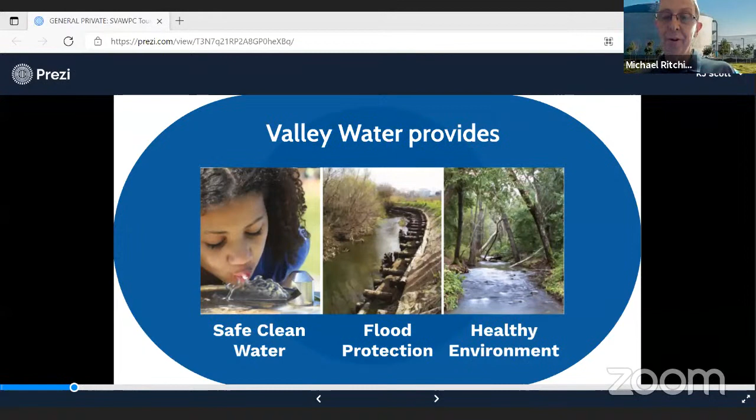Alright, so those are the 3 things that we do. Now I'll tell you a little bit about our domain—Santa Clara Valley Water District, Valley Water, covers Santa Clara County. The most important thing for you to know from this graphic is that we don't provide water directly to residents, for the most part. We provide our water to water retailers like San Jose Water Company, and they provide water directly. The total population in the county, with commuting and all those sorts of things, is about 2 million. But we do directly work with 4,700 well owners.

Now, this next graphic shows quite a comprehensive system that we manage in the county—all sorts of things happening here. First of which to tell you about is there are 10 reservoirs. When I first saw this graphic, I could not believe there are actually 10 reservoirs in Santa Clara County, but that is the case, and we do manage those 10 reservoirs.

All these lines that you see, for example the red lines, represent the pipelines coming from the Hetch Hetchy system, bringing water into the county from the Hetch Hetchy Reservoir. The orange lines represent pipes from the Delta conveyance system, and the green lines represent pipes delivering water to all the different water retailers in the county.

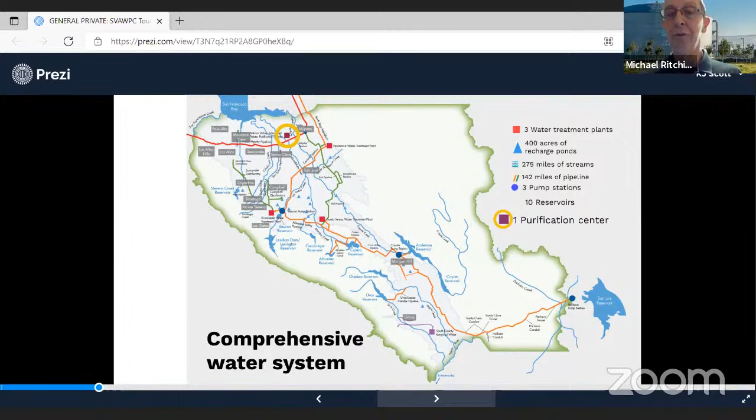We do have 3 water treatment plants: Rinconada, Penitencia, and Santa Teresa. All sorts of pumping stations, we're managing waterways. And most important for today is one additional thing we manage, the Silicon Valley Advanced Water Purification Center. That's up on 237 at Zanker, and we'll talk more about that soon.

So before we do that, we have a little poll check. We want to get your thoughts on something here: what percent of the water that we distribute in the county comes from local sources? What do you think? Is it 15%, 30%, 50%, or 70%? What percent of the water we manage do we obtain from our local sources?

You can see a lot of folks coming in and answering that question. We'll give a couple folks a little bit more time. We're already pretty close to getting everyone's response. And we will close the poll in 5, 4, 3, 2, and 1.

Okay, interesting to see almost an exact split between those answering 30% and 50%. The correct answer actually is 30%. We're here in a learning experience, as KJ has said, so no worries if you didn't know, but isn't that surprising? I thought it was surprising. Only 30% of our water portfolio comes from local sources, and that means both groundwater aquifers and those 10 reservoirs I mentioned.

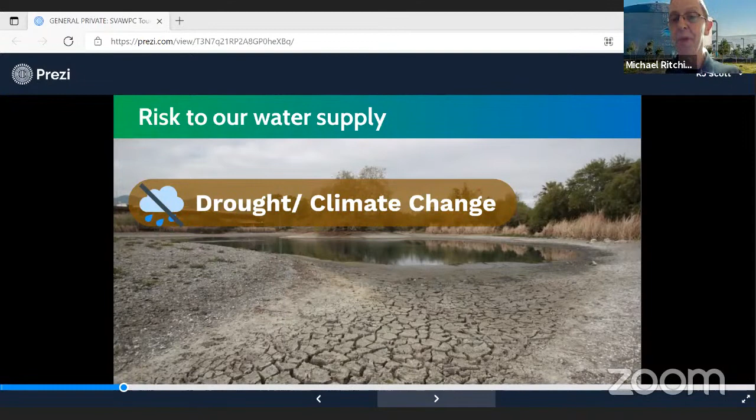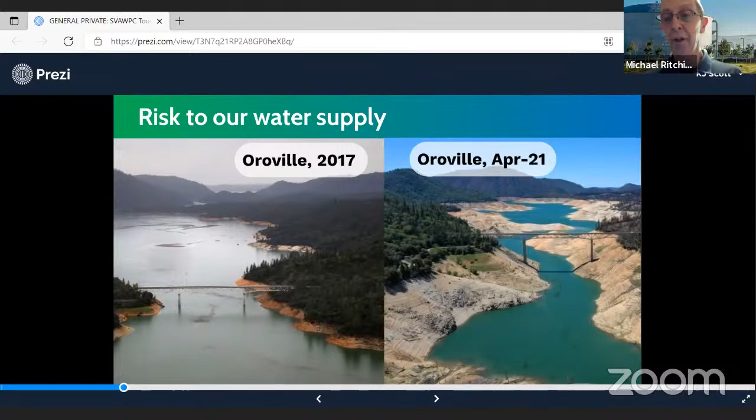So take a look at this next graphic to give you an idea of how severe things have been. Lake Oroville in our last really nice wet year, 2017, very healthy. This is one of the main state reservoirs up beyond Sacramento, and we certainly get a lot of water from there, as do a number of agencies in the state. But then as of April, very, very low - that's because of very little runoff, very little snow melt.

And then all the way into July, it's quite shocking, actually - if you take this next photo, you see basically we have no lake. I find it very shocking personally, but we're hoping - just this weekend, this lake rose 23 feet, was the article I saw in the paper. So it's got a long way to go, but at least it's going the right direction at the moment. So we have some work to do.

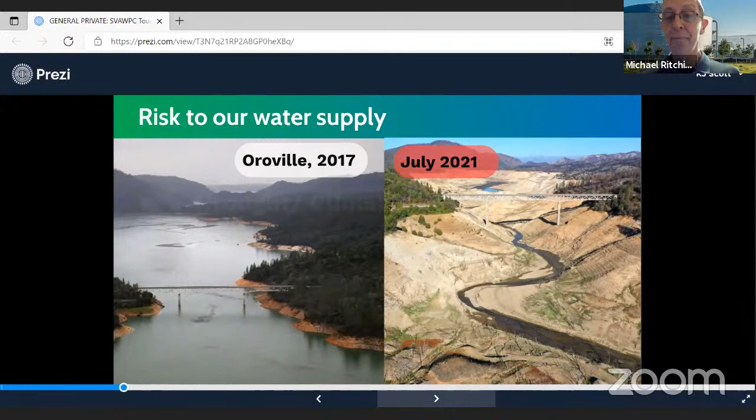Beyond climate change and drought, population growth is another concern. The census came in and said we're stable right now, but it's still expected to increase, so we have to account for more people needing water.

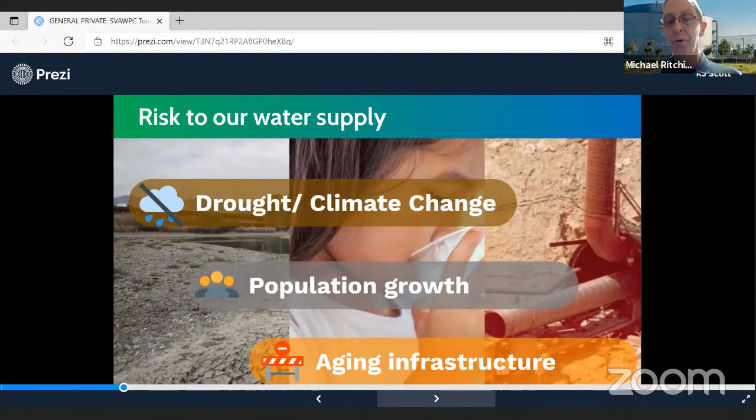Another thing we're worried about is aging infrastructure, one of which you've probably heard about is the Anderson Dam and Reservoir. This dam was deemed seismically unstable for a major earthquake beyond 7.0 on the Richter scale. They first thought we could repair and reinforce it, but after further study it was determined that isn't possible. So we've had to remove most of the water from this reservoir, distribute it as best we can to other places in the county, and now work has begun on rebuilding this. It'll be quite a big project to undertake.

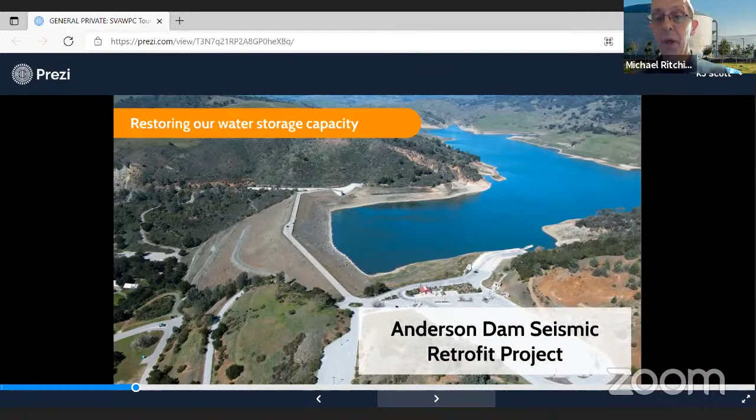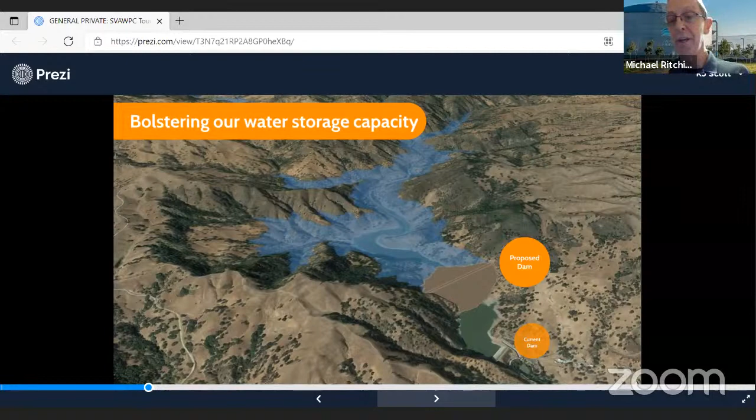Beyond that, we have another exciting idea. With climate change, we expect more extreme events - years of very significant drought, and years of maybe very large precipitation. So what we're thinking of doing is taking this tiny little reservoir in the county called Pacheco, the little one down in the corner, and building a new reservoir up above the current one. The tiny little one currently stores 5,500 acre feet.

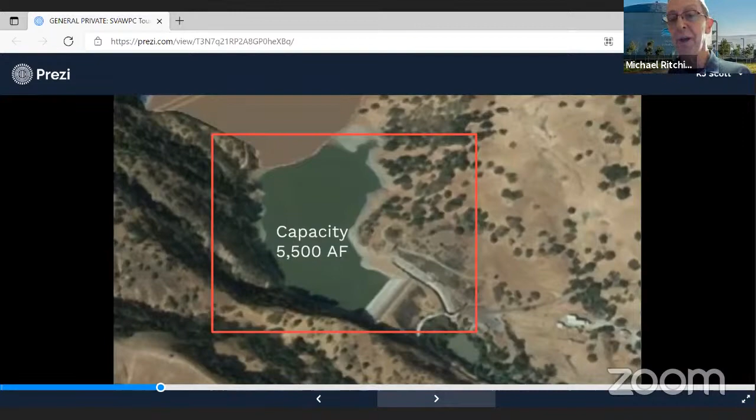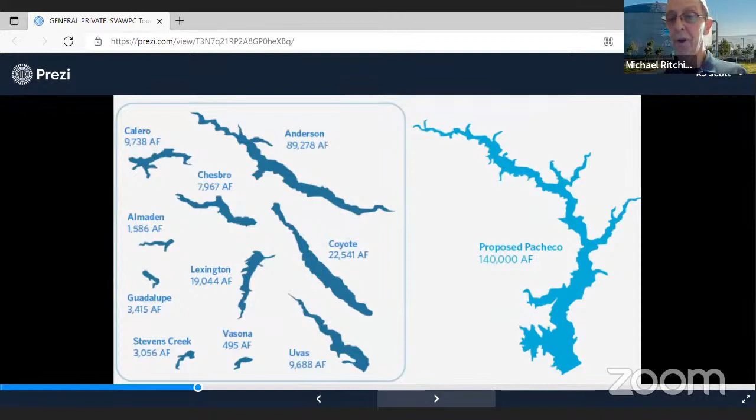This next photo shows some infrastructure issues as well, which need to be addressed. But the exciting part is, even in a normal year, we can't capture all the water - some goes into the bay. So this reservoir could help us capture water and use it, especially in those extreme wet years. It's a huge amount of water, 140,000 acre feet - enough for 1.4 million residents in a year. We would be able to double our surface water capacity. The 10 reservoirs we have now equal the proposed capacity of Pacheco alone, allowing us to store water for the future dry years we know we will have.

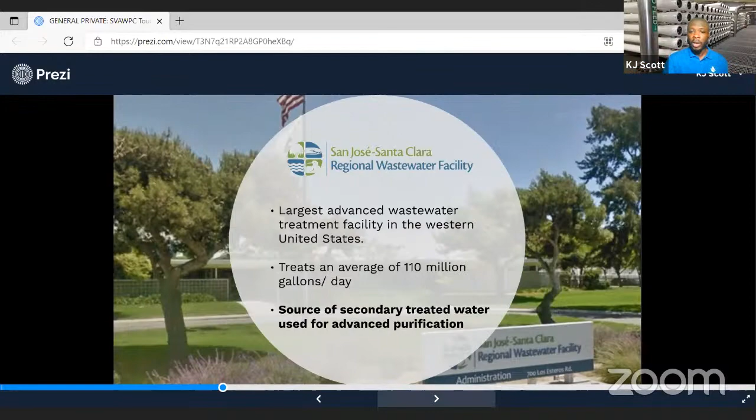When we talk about the Purification Center, we want to make sure everybody is familiar with the water cycle. The reason we bring up the water cycle is because it's why we're able to have water in the first place. All of the water here on Earth has been here forever - the Earth has its natural way of replenishing water worldwide, and that's through the water cycle.

So even all of the wastewater we create every day, the water cycle naturally replenishes and cleans it. But the water cycle can take a long time. As you all saw, we just got a lot of rainfall recently, but when's the last time we got rainfall like that? It's been a while, and it hasn't been raining as much today.

In order to make sure we have enough water for the 2 million residents in Santa Clara County, we must find ways to bolster our own local water supply. As Michael talked about previously, it's hard to rely on imported water when it's affected by drought and climate change. Right now 50% of our water capacity comes from imported means, so we can shrink that number down and boost our local water supply number up.

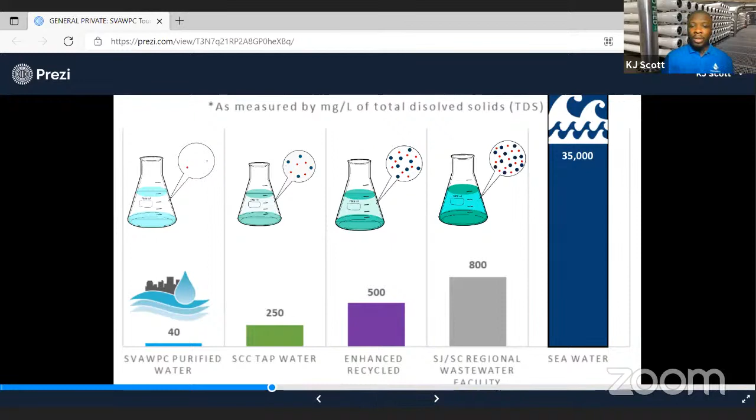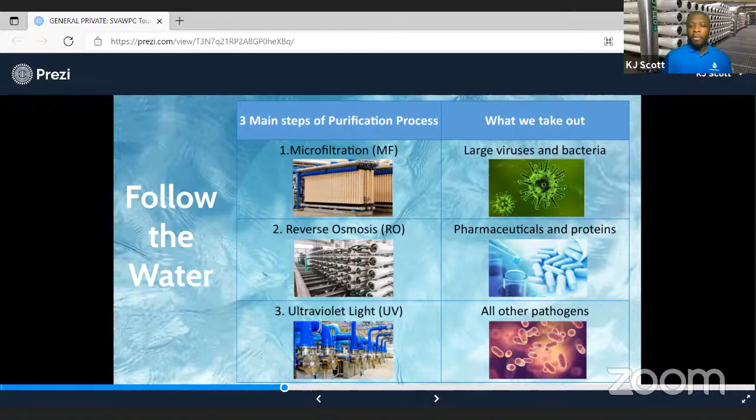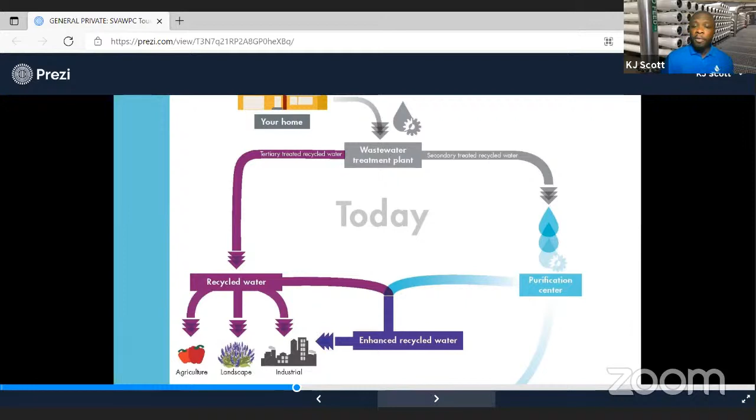This is how we are currently using the water. But in the future, we're going to talk about how we plan to use this purified water coming directly from the Purification Center to bolster our local water supply, or drinking water capacity more specifically.

Now we are about to tie up our virtual shoelaces, because if we were on campus right now, we would actually start walking. So we'll begin our virtual walking tour, and I'm now going to hand the mic back to Michael so he can get us started.

Great, thanks, KJ. So yeah, when you arrive at the parking lot at our facility, there's a little classroom right adjacent to it. You go in there first, get this first part of the presentation, and then you're ready to walk and come out outside.

A couple overview things to tell you that haven't been said already. Silicon Valley Advanced Water Purification Center is a collaboration and partnership between Valley Water and the cities of San Jose and Santa Clara. It's a testing facility, and its purpose is to study water reuse. We opened this facility in 2014.

As KJ said, typically in a day, 8 million gallons of advanced purified water is produced. It takes about 7.5 hours for the water to go through all the treatments we're about to talk about, and we'd love to have you come join us in person when we're able to reopen for in-person tours.

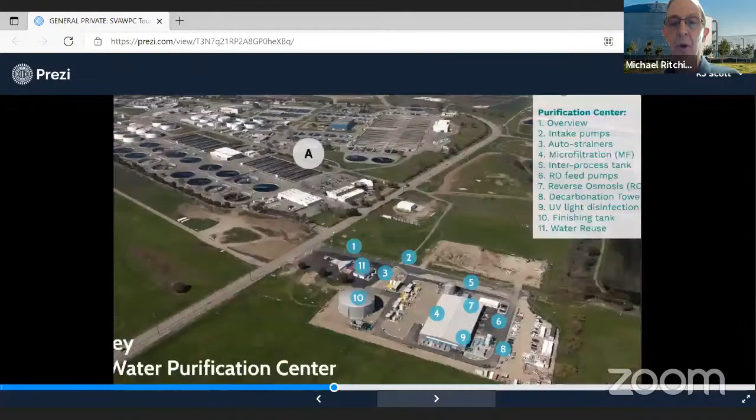There are three things we need to do with the water at this point. We need to pressurize it, disinfect it, and then send it on to be strained. In terms of pressurizing, we bring the water pressure up to 40 PSI, 40 pounds per square inch, so it can get through these first couple of treatment steps.

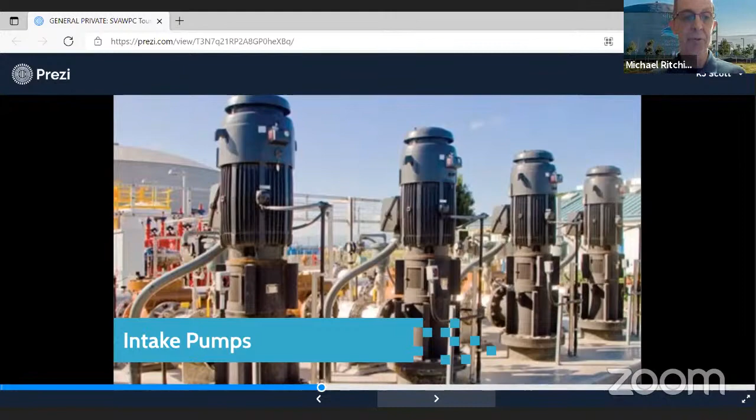After that, we need to add some disinfection to the water, to control biogrowth in the system in these first couple steps. From there, we walk on over to the auto strainers.

Not too far away as you're walking at the Purification Center, and this is what they look like. What do the auto strainers do? Well, they take out the bigger things in the water. If you wanted to do this, and I don't know exactly why, maybe curiosity...

If you had a glass and got some of the water at this point and held it up, you'd go, ugh, this kind of looks like river water. There are floating particles in it, so it's a bit unclear. There are small suspended solids, not big things, but small suspended solids you can see with the naked eye. What we can do here is take those smaller visible things out of the water, things approximately 300 microns in size and larger, about the diameter of a human hair.

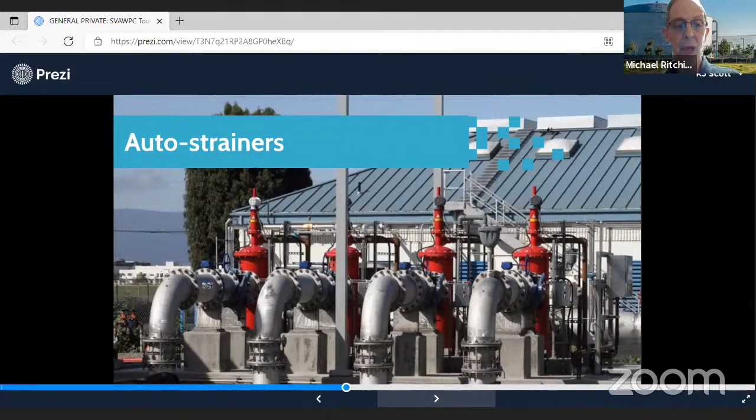So what we do next, and this next graphic will show you how it looks: here is this long tube, kind of like a pasta colander, whatever you want to call it. It's got this strainer, a basket, a wire basket, however you want to describe it.

We push the water through the center of these tubes and force it to go outside those tubes. The things you could kind of see get caught on the inside, and we have little vacuum devices that pick those things up in the middle and inside of these tubes. Every 30 minutes, we backwash those things, clearing everything out so we can treat more water going forward.

We take everything we don't want and send it to a wet well, and periodically all that stuff gets sent back across the street to the Santa Clara wastewater facility for further treatment. We have a special interprocess tank on campus that allows us to get that water to do the backwashing. So that's how we do this portion of it.

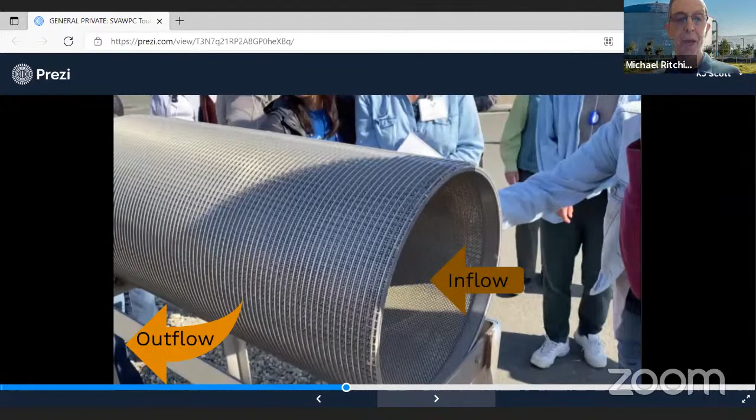Now it's time for another question, and we're asking this to give you an idea of the relative total capacity of the Purification Center. By how much would we need to expand the Purification Center's current capacity to handle all the indoor water needs for Santa Clara County residents? Is it 5 times, 10 times, 20 times, or 50 times? This is just to give you a rough idea of the capacity issues we need to think about while trying to become more independent for our water needs.

I will turn this over to KJ to give you that answer, end the poll, and continue the tour.

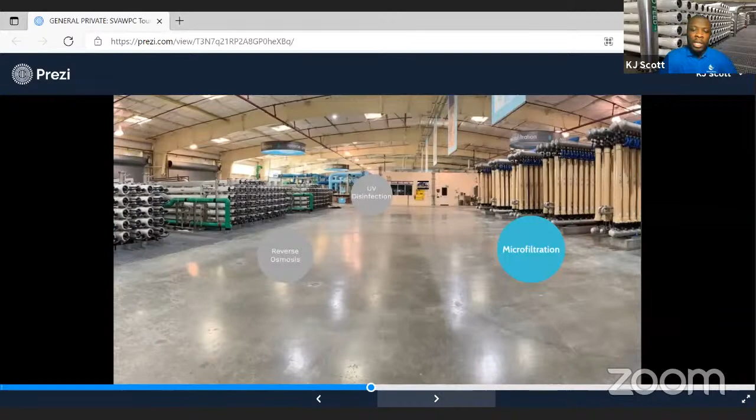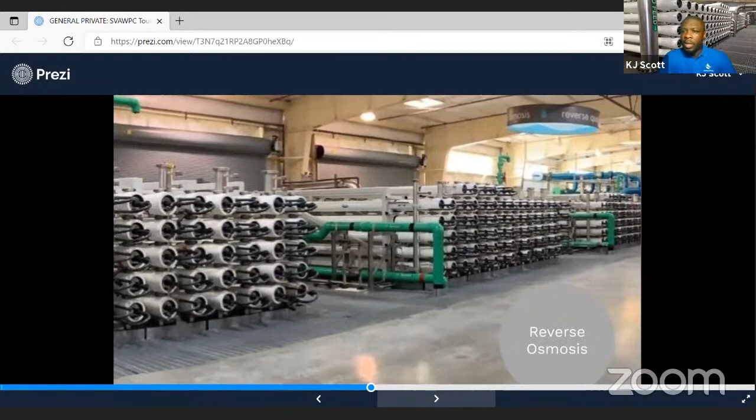Here's an inside look at the facility. We have microfiltration on the right-hand side, which is the next process we'll discuss. On the left-hand side, we have reverse osmosis, arguably the most important part of the whole Purification Center process. And in the very back, we have the ultraviolet light disinfection portion of the center.

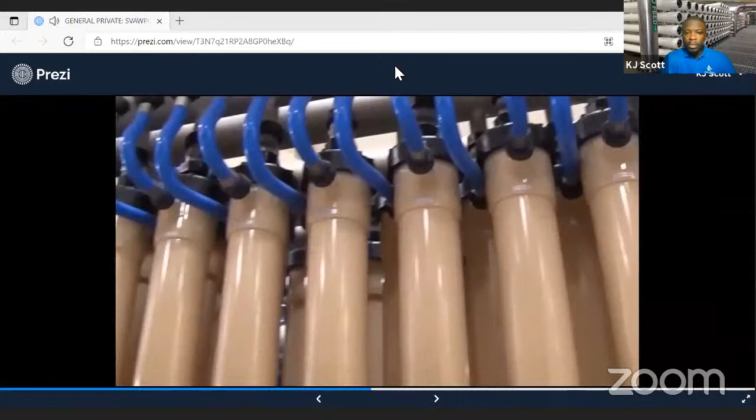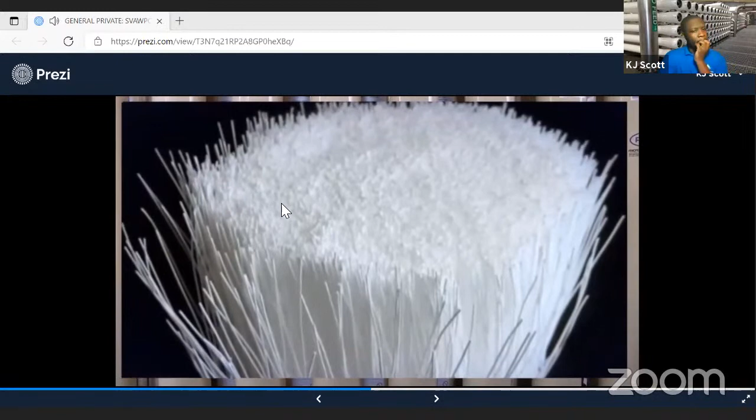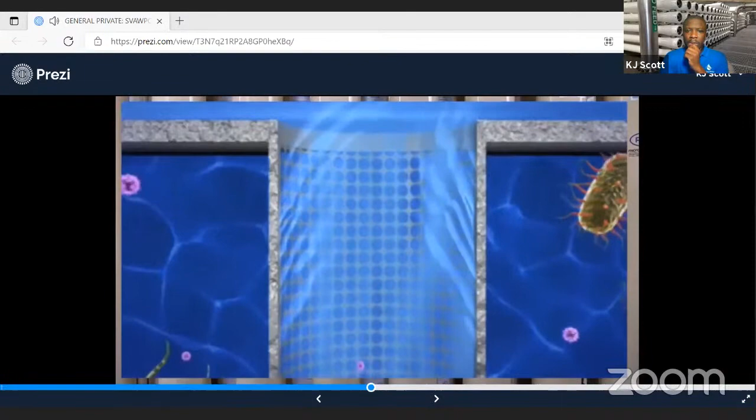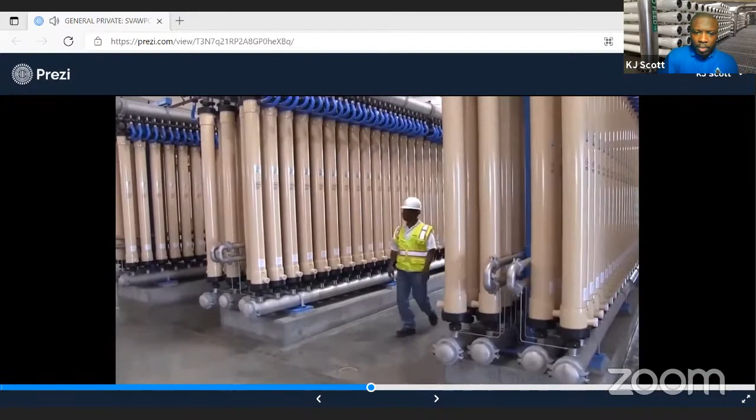During microfiltration, water is forced through racks of vessels, with each vessel containing thousands of hollow fibers. The outer wall of each fiber is made up of tiny pores, only 0.1 microns in size, about 300 times smaller than the width of a human hair. The fibers filter out microscopic particles such as silt, protozoa cysts, bacteria, and even viruses. Microfiltration vessels are backwashed periodically to remove buildup on the membrane walls, and the backwash water is returned to the pretreatment tank for reprocessing, helping the plant recover a higher amount of pure water.

All right, all right, all right, let's talk about microfiltration. It's exactly what it sounds like—filtration on a microscopic level. We have 896 of these vessels you see before you, and the goal is to filter out the first layer of microscopic particles from the water.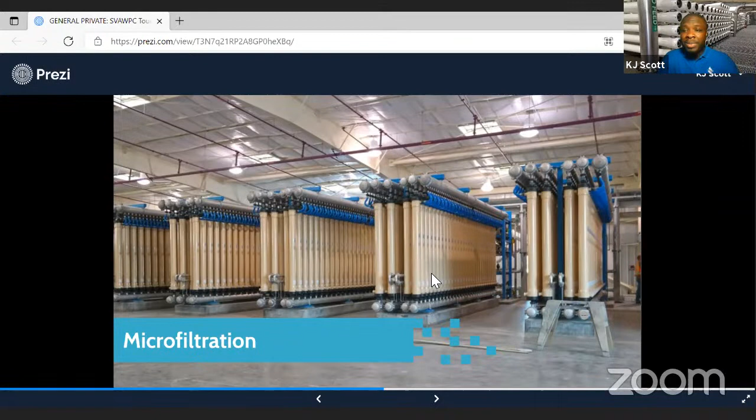Most large bacteria and viruses are actually removed here at this first stage. The water enters from the very bottom of these vessels and shoots all the way up to the top, and along the way there are tiny white fibers—up to 6,000 of them inside each vessel. If we were to cut the vessel in half, this is exactly what it would look like.

The water must squeeze into each of these little fibers you see here. There are microscopic openings, these pores, about 300 times smaller than the width of a human hair, along the sides of each fiber.

You cannot see them, I promise you. The openings that you do see here on the picture, that's the actual inside of the fiber. That's where the final product water will end up once it has successfully passed through the system.

However, all of the debris and contaminants that are in the water that are not small enough will remain on the outside of the fibers here, and the system is backwashed every 30 minutes. After 30 minutes, all of these contaminants that we don't want in the system are flushed out.

Essentially it's sent back to the regional wastewater facility for proper disposal. We measure this in micron size, and microfiltration removes a lot of large viruses and bacteria, because on a microscopic level, these contaminants are pretty large organisms.

So it's just a simple matter of size. Size-wise, they're not able to pass through the system, and we use pressure to make sure that we are able to squeeze out the water molecules, because the water molecules are small enough.

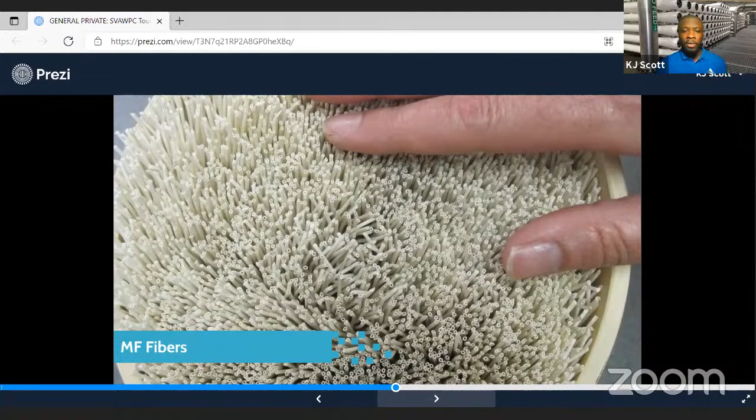Once we leave the microfiltration part of the center, we are ready to head outside to get some vitamin D, get some sun, and we are at the interprocess tank. The interprocess tank serves two main functions: first, it provides the water for the backwash system we just spoke about. Secondly, it regulates the flow of water going to our reverse osmosis feed pumps.

The reverse osmosis feed pumps are next, in the back of the facility. Their job is to prepare the water for reverse osmosis, a more specific process removing even smaller material from the water. These pumps are pressurized a little bit more than the pumps before, anywhere between 130 and 140 PSI.

So we're talking about drinking water capacity. In order to use this ocean water, we have to remove the salt content from it. The removal of salt from seawater is called desalination. Desalination is being used in some areas, but it is not the most efficient process at the moment with current technology to extract the salt out of the water.

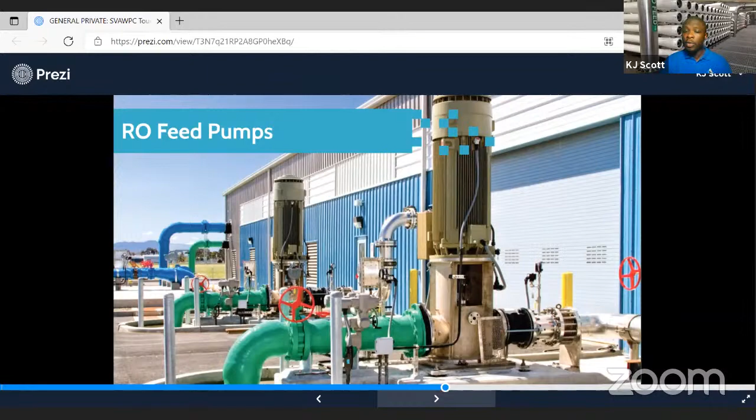And so once the water is pressurized, the water is now ready for the reverse osmosis process, which is next. And we're going to head back inside for that. And we have another quick video here for you all to view, and we will post a link in the chat for you all.

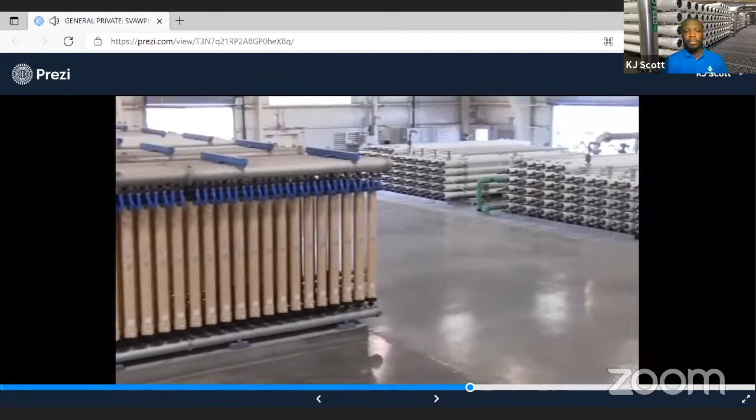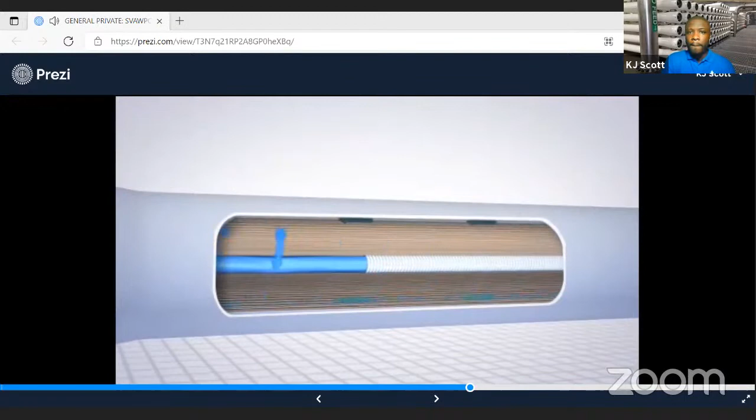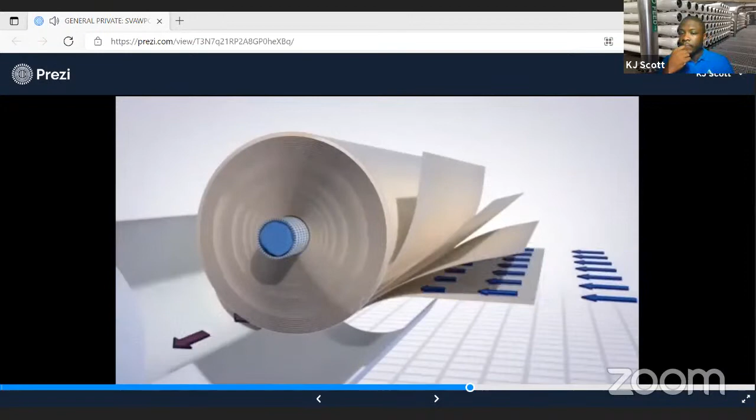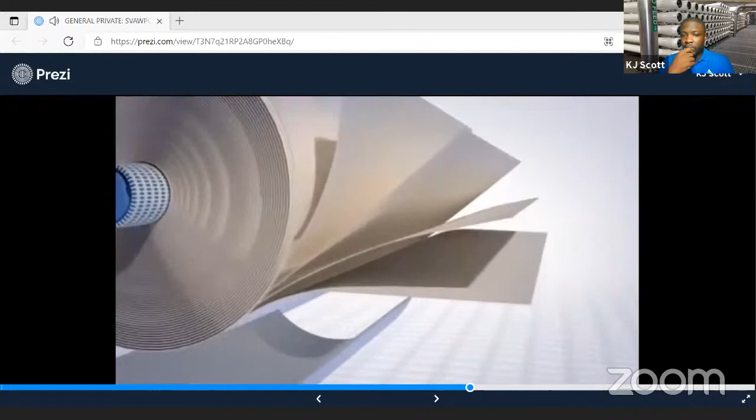Reverse osmosis works by forcing water through a special plastic membrane sheet to remove compounds such as salt, organic compounds, microorganisms, and viruses. Rolls of membrane sheets are wound into cylinder-shaped elements. There are several elements inside each long pressure vessel. As water enters the vessel, it flows over the membrane surface as it moves from one end of the vessel to the other. The membrane layer is extremely thin. It allows water to pass through, or permeate, while preventing other compounds from passing through. Membranes remove molecules based on their size, shape, and charge.

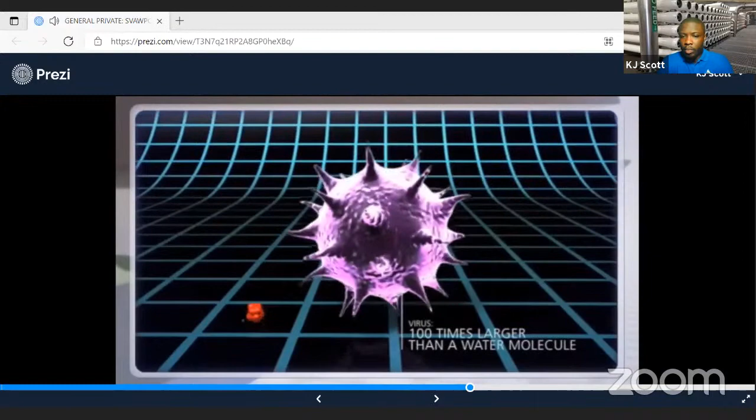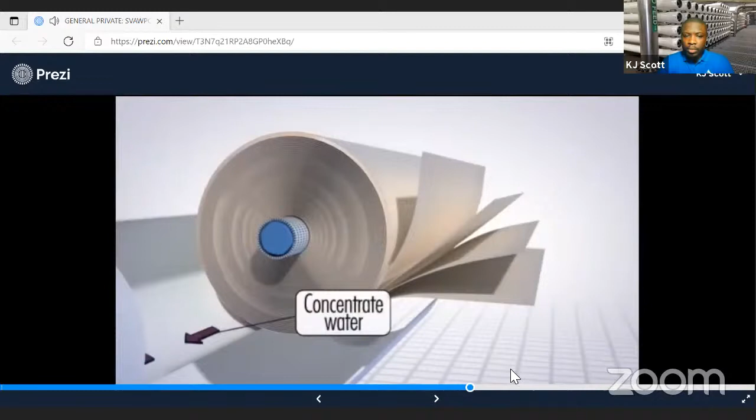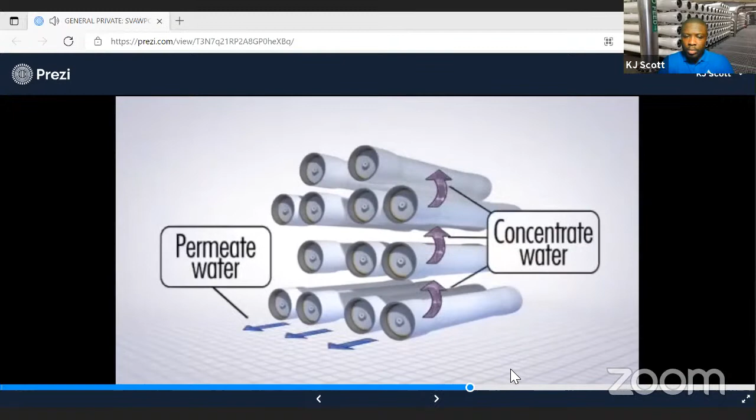Generally, contaminants larger than water molecules will not pass through, including most chemical contaminants and all microorganisms, such as virus and bacteria. Two streams of water are produced. Pure, clean water, called permeate, flows across the membrane sheets and passes through the membrane layers to the inside core tube. Water that does not permeate through the membrane becomes more highly concentrated in salt and other substances. This water is called concentrate. The pure permeate water flows out the tube at one end of the pressure vessel, and the concentrate water flows out another outlet. The concentrate water can then flow into other pressure vessels for the same process to happen again, so even more pure permeate water can be recovered. About 82% of all the source water becomes purified water.

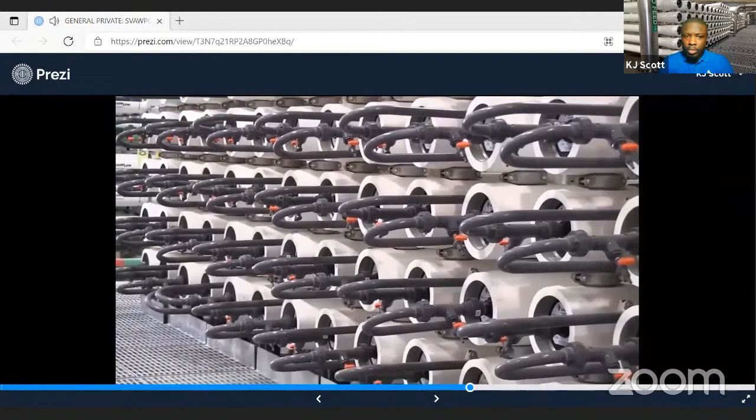All right, reverse osmosis. The main thing I want you to remember about reverse osmosis is that anything larger than a water molecule is removed from the water. Water molecules are very small on a microscopic level. Once again, we measure this in microns. A water molecule is about 0.0002 microns in size, okay?

As I said previously, most of the large bacteria and viruses have already been removed from the water. So now we're dealing with smaller content that is trying to remain in the water, right? The great thing about reverse osmosis is that not only is it about particle size which is removed, but also it's about charge. So particles that have charge that are small enough to actually pass through the system are also removed from the water. So that's the great technology that we have here.

To give you an analogy about this, if a water molecule were to be the size of a marble, remember, you got to be marble size in order to get through the system. Most contaminants, large bacteria, viruses, salts, minerals, things of that nature - specifically the large bacteria and viruses - would be the size of a skyscraper, a large building. Even some of the smaller bacteria would be the size of an adult-sized human being. So just imagine an adult-sized human, or a building, trying to squeeze through a marble-sized hole. Impossible. It's not happening, right?

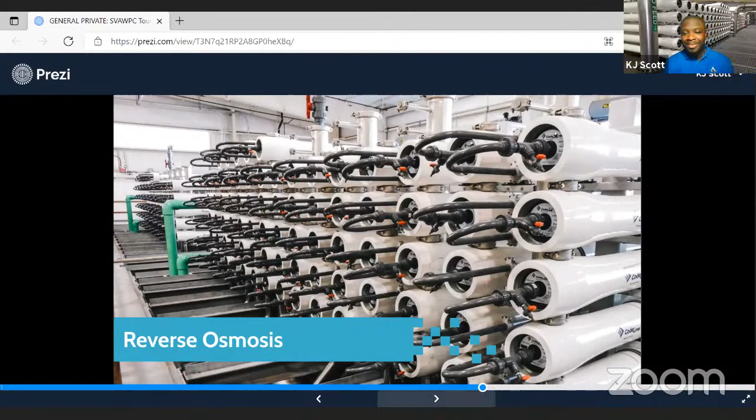Thanks, KJ. Yeah, so now we're back outside at the decarbonation towers. As KJ mentioned, the water is now very, very clear, approaching that 40 TDS. But before we do one more major treatment, which is ultraviolet light disinfection, we have a little issue to take care of - over the last couple of steps, CO2 has been formed and is now present in the water, and that needs to be removed.

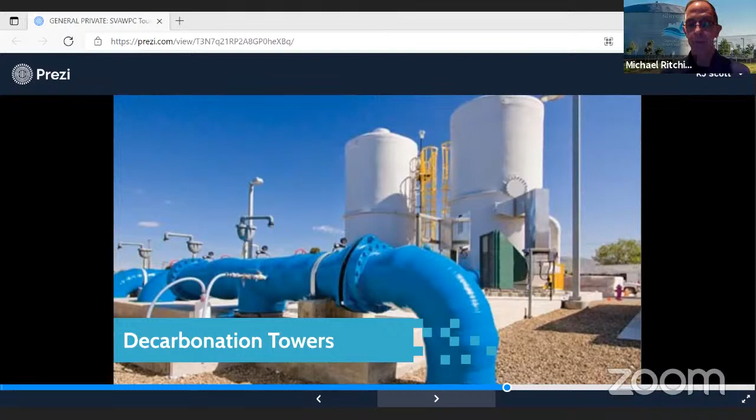So what we do is take the water, the RO permeate, and send it into these towers. We also send air in at the same time, and force it together with diffuser balls inside those towers. What ends up happening is the CO2 gets separated from the water and passes out the top of these tanks. It's actually a very small amount of CO2.

The state of California says it's nothing of concern to them - it doesn't even need to be regulated, it's such a small amount. But it is important from our standpoint, because CO2 is acidic and can degrade our equipment, especially the pipes and storage tanks downstream from here. So we do need to do this step to take care of that issue.

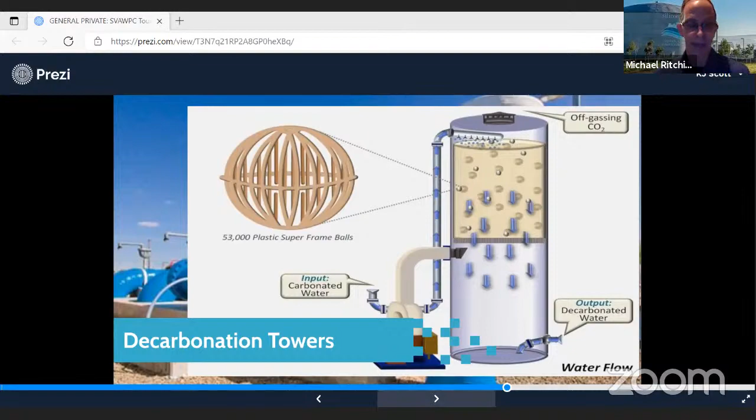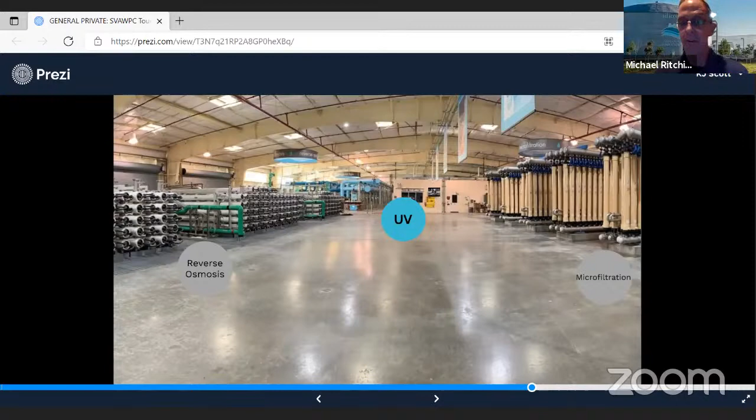So at that point, we go back inside the facility for the last major step, which is UV light disinfection. I'll go ahead and pop this last video link into the chat, and KJ will play the video and then we'll tell you more about it.

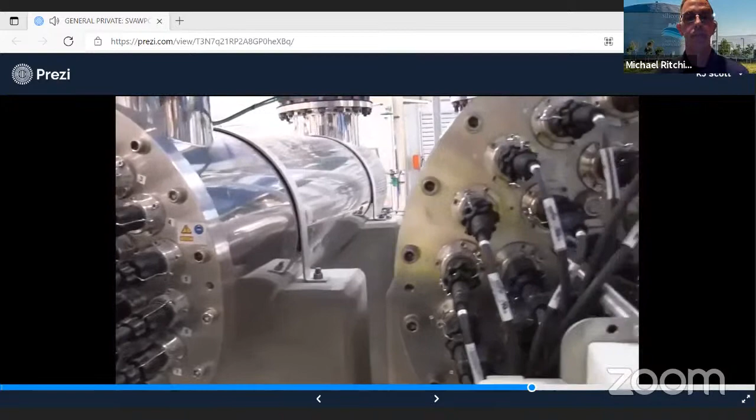The next stage is ultraviolet light. The water is exposed to strong UV light. This process removes any trace organic molecules. The process is similar to the one used in medicine and dentistry to sterilize equipment.

You can see in that video and also in this photo these large silver or shiny gray objects - there's actually a set of 6. Those round porthole things with the pipes at the top, we call ultraviolet light trains, and each train has 2 ultraviolet light reactors. Water gets sent through at least one of these trains, and what we do is expose the water to the high intensity ultraviolet light.

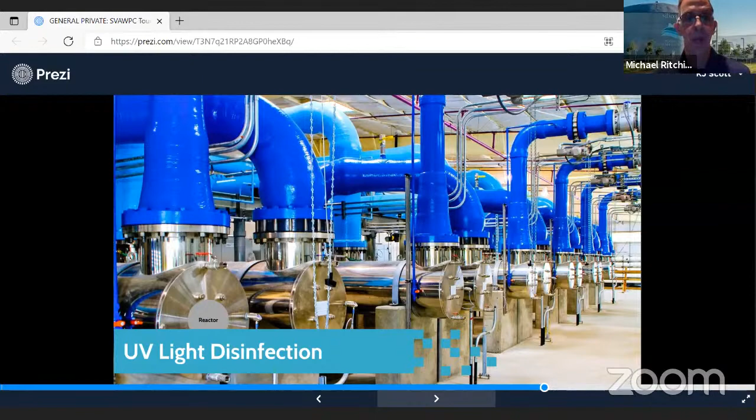In these trains are reactors, and in each reactor are 40 high intensity ultraviolet light lamps - we have a graphic to show you that. The water only needs 30 seconds of exposure to do what we need to do, though we do it twice.

What we're looking to do here is further disinfect the water. This is a redundancy step to take care of anything that passed through what KJ mentioned. Ultraviolet light will disrupt the DNA of any pathogens that did happen to make it through, so they are not able to multiply. It also breaks down any volatile chemical compounds, breaking the bonds of those chemical compounds.

The inside of these trains are mirrored, so the water really gets fully exposed to the ultraviolet light. If you think about what you hear so much about - if there's a problem with water or some kind of emergency, the thing you can do is boil water, and that will help you stay safe so you can drink it. Well, ultraviolet light disinfection is actually 20,000 times more efficient and effective than boiling water. So you can tell it's a very, very effective process.

Nevertheless, the water reuse industry and the state of California require one more redundancy step: adding advanced oxidation. This is a clever way to make sure the water is safe to drink, because we add very small trace amounts of hydrogen peroxide, which reinforces the disinfection. The hydrogen peroxide dissipates very quickly, especially in these tiny amounts. It does its job, and then we don't have to worry about it.

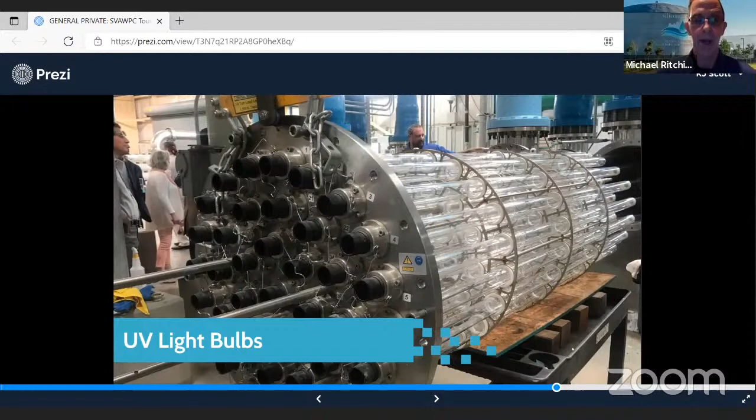So now we have advanced purified water. One exciting thing to think about is that you might have already consumed or come in contact with advanced purified water. There are different places throughout the country and the state. For example, if you've been in Orange County since 2008, the Orange County Water District has been producing advanced purified water for drinking. They're currently at 100 million gallons a day. If you've been to someone's house, a restaurant, or Disneyland, had tap water, or showered at one of the hotels around Disneyland, you have most likely come in contact with advanced purified water. So it is definitely safe, and it's something that's been happening for quite a while.

Now, to finish up my portion: this giant storage tank is where the water ends up next. I like to think of this a little differently — it's almost like a giant on-off switch. It holds 2.25 million gallons of water. The reason it's an on-off switch is that when the water level goes down to a certain point, the whole system kicks on. This is a fully automated system. So when we need water, the system kicks it on. There are operators always on site to make sure things are running smoothly and any issues are addressed, but it is an automatic system.

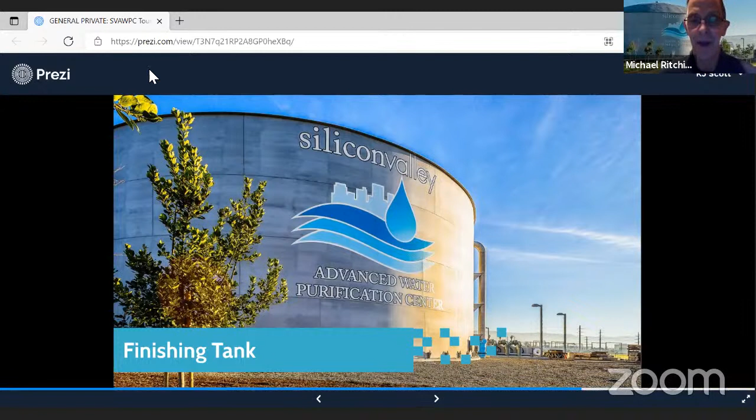As KJ already mentioned, the water we produce is used for agricultural and industrial purposes. That's how we use the water now. Next, let's think about where we can use the water in the future.

Thank you, Michael. All right everybody, that will conclude our walking tour. Now just a little bit about Valley Water and some efforts we have going on moving forward — what are we doing in terms of looking to the future, and how do we want to use this water? Currently we have drafted what's called the Countywide Water Reuse Master Plan.

The master plan outlines different ways to build on existing water recycling systems and complete projects for both non-potable and potable reuse, including purified water projects to boost our local drinking water supplies by up to 24,000 acre-feet per year. Potable just means drinkable, or allocated for drinking purposes. So when we talk about potable and non-potable, what does that look like?

Non-potable means that right now, the water we're using from the Purification Center isn't for potable purposes — we're recycling it and using it for recycled water systems. Then for potable, we're going to talk about what that looks like.

Just so you all know, as we talk about expanding this to 24,000 acre-feet a year, an acre-foot will actually satisfy up to 10 people for a year of water supply. So 24,000 acre-feet is going to make a big impact, and eventually we want to expand this number to 45,000 acre-feet a year.